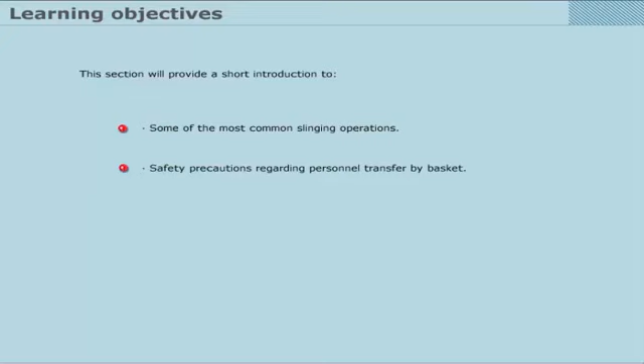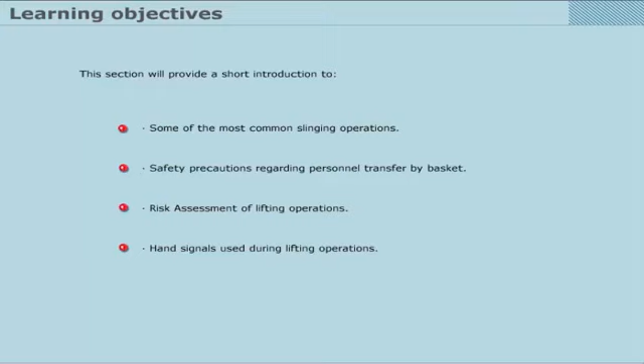This section will provide a short introduction to some of the most common slinging operations. Safety precautions regarding personnel transfer by basket. Risk assessment of lifting operations. Hand signals used during lifting operations.

There are many different aspects of a lifting operation that must be considered before start of the operation. One of the most important is how to sling the load, what type of gear to use and how to attach the gear. In this section, we will have a look at a few of the most common slinging operations.

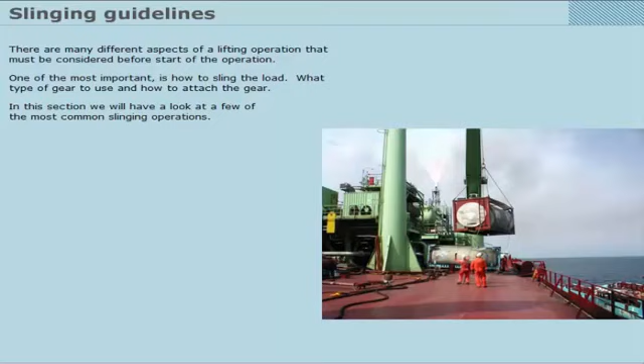This is a very common task on board a ship or offshore installation. Lifting of several pipes, rods, etc. in one lift can be dangerous if it is not done in a safe manner. One typical and very dangerous mistake is to lift tubulars of different diameters or even tubulars together with, for example, steel bars in one lift. In such cases, there is a great risk that the smaller items may slip out.

Try to follow these basic guidelines when lifting tubulars at your workplace. Always position the slings approximately 25% from each end of the items to be lifted, if possible. Wrap the sling double around the tubulars in a choke hitch and tighten choke. Land the lift and release the slings carefully, as individual tubes may roll.

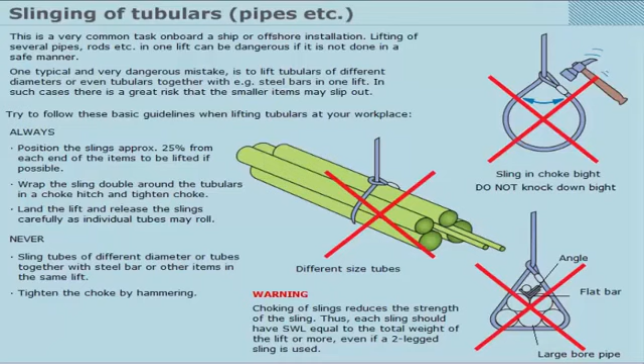Never sling tubes of different diameter or tubes together with steel bar or other items in the same lift. Tighten the choke by hammering. Warning. Choking of slings reduces the strength of the sling. Thus, each sling should have an SWL equal to the total weight of the lift or more, even if a two-legged sling is used.

When slinging cable reels, care must be taken not to damage the cable. Use of soft fibre slings is preferable, but if wire slings have to be used, wire cables should be protected by timber packing or similar. Electrical cables should be slung through the reel opening in all cases. Some of these cables are very sensitive, and the slightest deformation may make them unusable.

The preferred method of slinging drums is to use 2 fibre slings, but cargo net or drum slings may also be used. Extreme caution must be exercised when using drum slings, as they tend to slip off immediately when the load upon the slings is released. These slings must only be used for internal transfer, on board or on the rig.

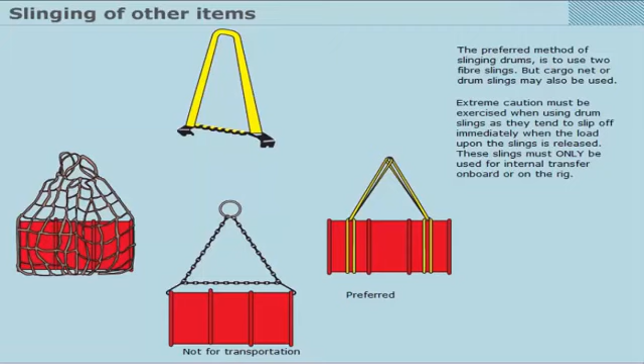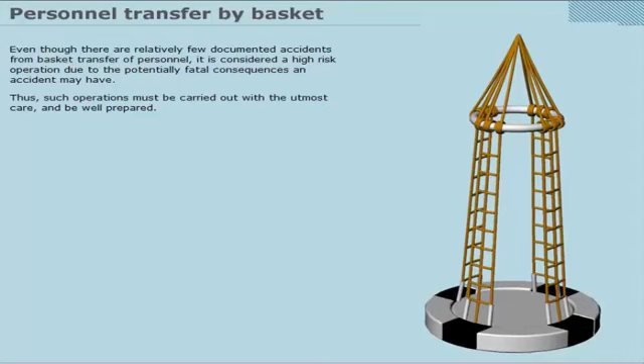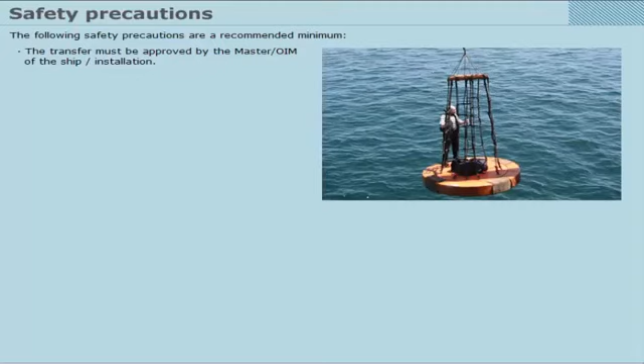Even though there are relatively few documented accidents from basket transfer of personnel, it is considered a high-risk operation due to the potentially fatal consequences an accident may have. Thus, such operations must be carried out with the utmost care and be well prepared. The following safety precautions are a recommended minimum. The transfer must be approved by the master or OIM of the ship or installation.

There must be good visibility, adequate illumination and weather conditions permitting a safe transfer. The crane operator must have ample experience and be confident in his ability to carry out the transfer in a safe manner. Prior to the transfer, the person responsible for the transfer should examine the basket.

Before starting, the lift-off and the landing areas must be cleared in an adequate area for the basket to be lifted and landed safely. There must be direct radio contact between the responsible person on deck, the crane operator, and the master of the supply vessel. During the transfer, a rescue boat or standby boat should be ready for immediate action in case of a man overboard situation arising.

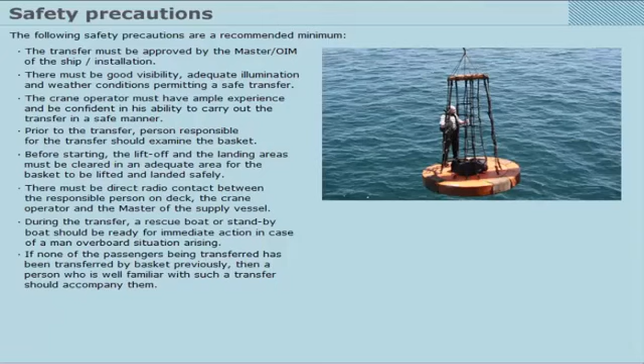If none of the passengers being transferred has been transferred by basket previously, then a person who is well familiar with such transfer should accompany them. During transfer, the passengers shall stand on the ring outside the ropes and have both hands free to grip the ropes. The passengers must wear life jackets or life-saving suits during the transfer.

Small amounts of luggage can be permitted on the basket if placed in the middle, but it is preferable to transfer the luggage in a separate transfer, without passengers. Lifting and lowering of the basket shall take place over open water, and the vessel shall be prepared to stop the propellers during the transfer. Personnel transfer with baskets shall be recorded, together with prevailing weather conditions, in the appropriate log or record.

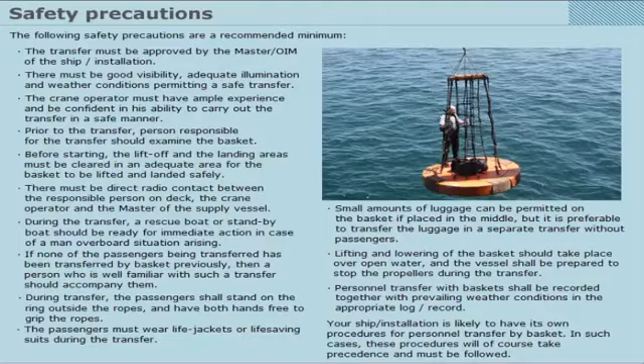Your ship or installation is likely to have its own procedures for personnel transfer by basket. In such cases, these procedures will of course take precedence and must be followed.

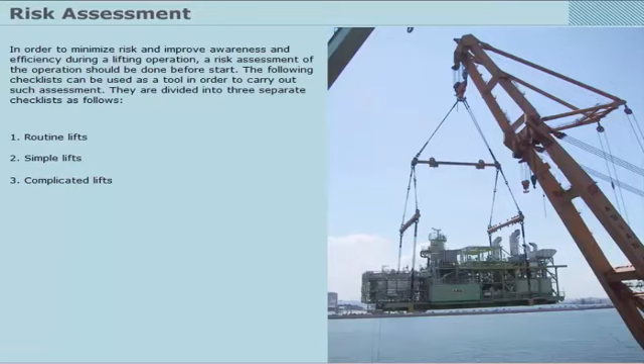In order to minimize risk and improve awareness and efficiency during a lifting operation, a risk assessment of the operation should be done before start. The following checklists can be used as a tool in order to carry out such an assessment. They are divided into 3 separate checklists as follows. Routine lifts, simple lifts, complicated lifts.